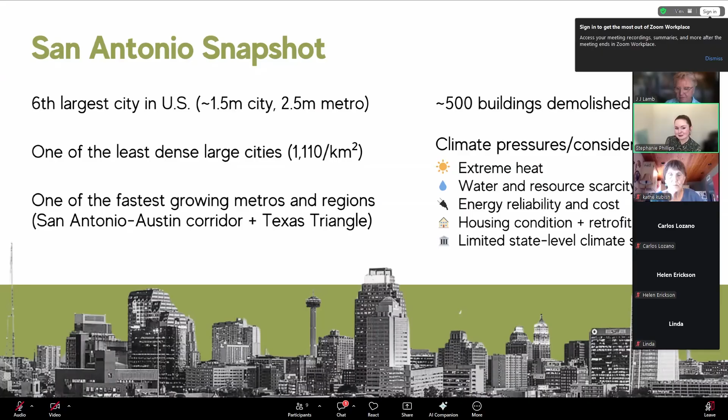And our specific program that we'll be going over today is our Deconstruction and Circular Economy program, which again is housed in the Office of Historic Preservation. This program is relatively new. It was formalized in 2022. And really our goal is to leverage the reuse and repurposing of buildings and their materials in an effort to advance local economic, cultural, and social prosperity. So when it comes to building material reuse and building reuse in general, you hear a lot about the environmental benefits of those. They are vast, but we also want to bring in the cultural and historic preservation dimensions as a key component of our program.

And to facilitate the mission of our program, we have 4 primary program areas that our team works on every single day. And by our team, I mean me and one other staff person. There are 2 whole people that do this. The biggest thing that we administer, which we'll talk a lot about today, is our deconstruction ordinance, an actual local law that requires deconstruction for certain building types. And to support that policy, we also have a deconstruction workforce training program.

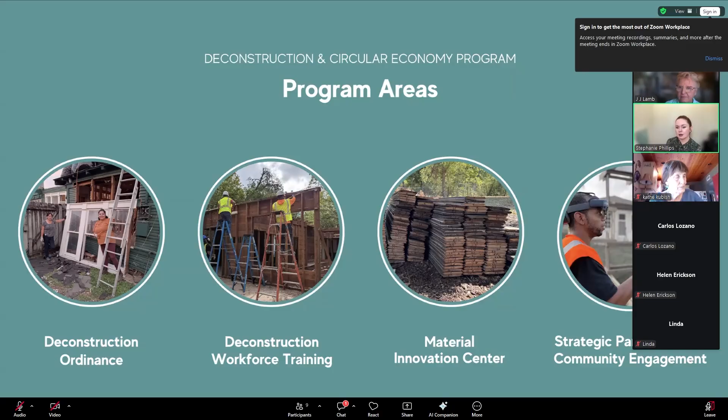We have a small facility called the Material Innovation Center that recaptures and redistributes building materials, which I'll talk a little bit about later. And then something that really undergirds our entire program is our efforts to focus on strategic partnerships and community engagement. It would be utterly impossible for us to do this by ourselves. So it's really, really important to us to continuously build partnerships within the city of San Antonio, the region, and honestly, we're really engaged nationally and internationally on the topic of circular economy in the built environment. So a big part of my job is managing those partnerships.

And something that's really important for us to emphasize as well is that we view our program as a demolition alternative, not a preservation alternative. So deconstruction does not take the place of preserving a whole building. That is always the goal. So we leverage the programs and policies on the books in San Antonio to try to keep buildings standing as much as possible. But if a decision has been made for the building to come down, that's where you go down the fork of, does it require deconstruction or can it come down via traditional mechanical demolition?

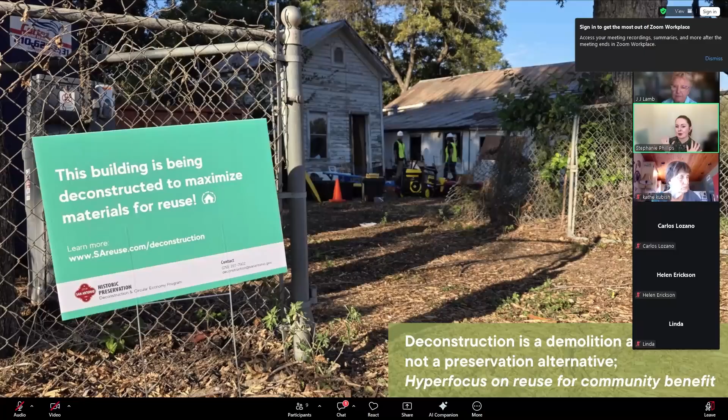And just that focus on deconstruction being a demolition alternative has also really instilled in us that our program has a hyper focus on reuse for community benefit. So you'll see that as a thread through how our program functions, and the work that we do is really focused on leveraging material reuse to benefit workforce development, affordable housing, arts, culture, education. So we really want this to be something that benefits the community in as many ways as possible.

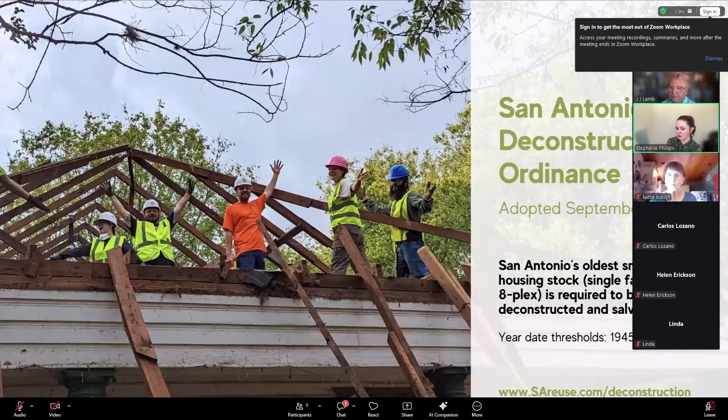And the first program area I really want to highlight is our actual deconstruction ordinance. So we are the largest city in North America currently with a deconstruction policy and actual regulation, and it was adopted in September of 2022. It requires our oldest small-scale housing stock, which I'll elaborate on in a second, to be deconstructed if it is approved for removal. And some key dimensions of this policy are unique to our city. You'll hear about a few others in this webinar series, but our ordinance only applies to residential structures. It doesn't include commercial or industrial or institutional, although we do have ambitions in the future of potentially expanding our ordinance into those building types.

We also took a phased approach to our ordinance. So in September of 2022, City Council adopted our ordinance, and it included automatic expansions. So the first phase of our ordinance only applied to city demolitions, and it applied if the building was built in 1920 and earlier, anywhere in the city, and 1945 and earlier in historic districts or any of our protective overlays. And then phase 2 took effect in January of 2023, and that expanded to all demolitions, including private demolitions. So if you were a developer or a property owner that wanted to demolish a building, those parameters applied to those projects.

And then finally, in January of 2025, we expanded in our final phase, which is active currently. And that expanded the build date to 1945 and earlier anywhere in the city, and 1960 and earlier in those protected districts. So we're starting to inch into the mid-century building types in landmarks, historic districts, and neighborhood conservation districts.

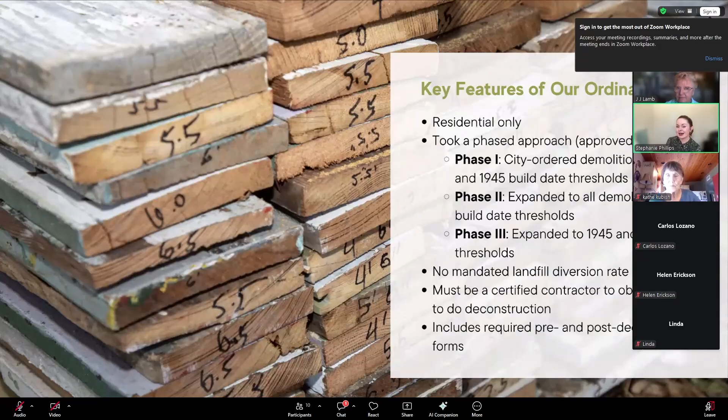So I wanted to give you a sense of the timeline for this policy development, because I hear from y'all in Tucson and a lot of other cities like, oh my gosh, we're so behind, we need to do this right now. And I want to emphasize, it took us 4 years of dedicated policy development to get an ordinance across the finish line. That may seem like a short amount of time to you. That may seem like a long amount of time to you, depending on your experience with city policies and how quickly they can move.

Our phase 2 was in effect for exactly 2 years, and now we're in that third and final phase, which is indefinite. And the best way I can describe why we chose a phased approach is we wanted to take bite-sized pieces out of the demolition pipeline and convert those buildings into deconstruction slowly, so that our workforce training can build up contractors to do the work on behalf of those that needed to take down buildings via deconstruction.

But our near west side and our near east side has the exact same housing stock as some of these historic districts. They just don't have the regulatory tool to avoid demolition. But that doesn't mean that they're any less worthy of protection. It's just literally a zoning overlay that determines if it's easy or hard for a building to get demolished.

And just to kind of formalize that, this is our position. Our work does not end at a historic district boundary. This is a form of preservation too. If we can recapture building materials and develop policies and systems and partnerships to get them back into older houses to restore them, that is absolutely a preservation win. So this kind of ideology is growing among the preservation field nationwide, and we're really excited to kind of spearhead that.

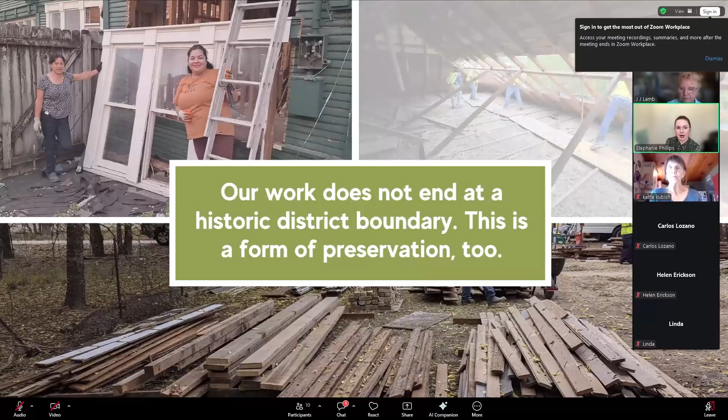So a key step that we took when we were developing our deconstruction policy is we formed a deconstruction advisory committee. And I wanted to break down who was represented on that committee for you all. We had a bunch of public agencies, so a bunch of city departments spanning from solid waste to housing to public health, as well as our local UT San Antonio University, and then our regional council of governments.

We also had a lot of nonprofits and community organizations represented. So our preservation nonprofit, a lot of environmental nonprofits were involved in the discussion. And then it was really important to us to also bring in private entities to the conversation, the people that would be most likely to be affected by this work: demolition contractors, deconstruction contractors, general contractors, reuse stores, landfills and waste haulers, and then major developers. We also had land use attorneys on our committee.

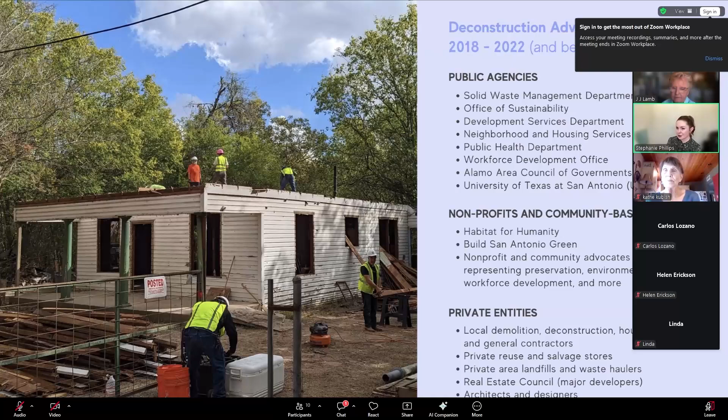So it was really important and actually really effective for us to hold meetings pretty consistently that had the most environmental people and the most pro-development people sharing a room, because that doesn't always happen in practice. And it was really important for us to work together to develop a policy strategy that really made sense for San Antonio specifically. So this is what that advisory committee looked like.

And from a preservation perspective, something that was really key in launching our policy development is doing what we do best, which is nerding out over historic research. So I think it was really, really key, and we continue to communicate this, is that deconstruction is not new. It's not like this new fancy thing that we're making up and telling people to do. It's what we used to do when we removed buildings before we invented the heavy machinery that tears down buildings today. So demolition is actually very new in the scope of our building trades, but deconstruction is a historic trade, and that's how we communicate it.

So we went around the city a lot into our historic neighborhoods and really emphasized that this is a historic practice, and wanted to tackle head on any concerns that the preservation community had around, oh, we're going to talk about buildings coming down, which can be a scary conversation sometimes.

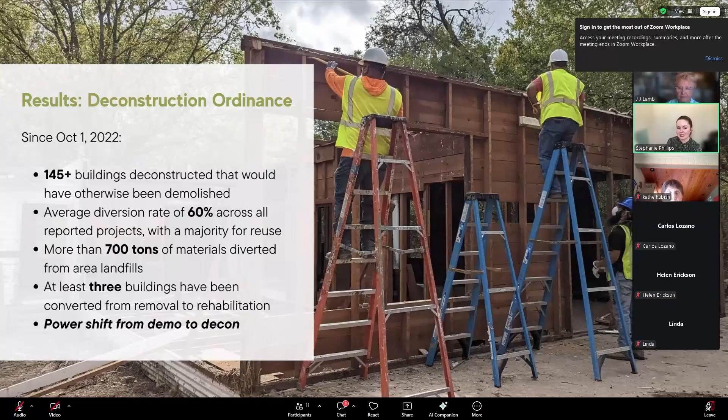And I promise to take you behind the scenes on what this looks like in practice. So our office and our team specifically looks at every single demolition that comes through the pipeline. And if it looks like it's older, pre-1920, we create this build date confirmation form.

And this is where I think preservationists really excel in this conversation, is that we're using a lot of primary sources that you might be familiar with: city directories, Sanborn maps, deed research, newspaper archives, looking at the architecture of the building to confirm the build date of the property.

And just an example of what this looks like in practice, this cutie little historic property was coming down, and we needed to confirm that the build date fell under the deconstruction ordinance. So you'll see that Jess, our staff member, looked at city directories. She found a deed of trust that is dated 1919. You'll see that she was looking at city directories to confirm that this building was occupied in 1919. And then here on the Sanborn map, she found that exact structure with the same footprint.

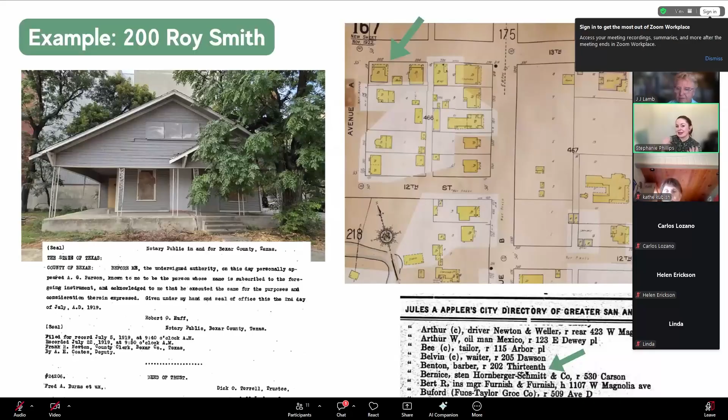So this is a little bit of behind the scenes of the work that our staff does to really make sure that a building is falling under the ordinance, while also developing a bit of a historical record for a lot of times buildings that are a little bit more simple, utilitarian, but also are really important and deserve to have their history documented, in addition to the beautiful landmarks that are celebrated across the city.

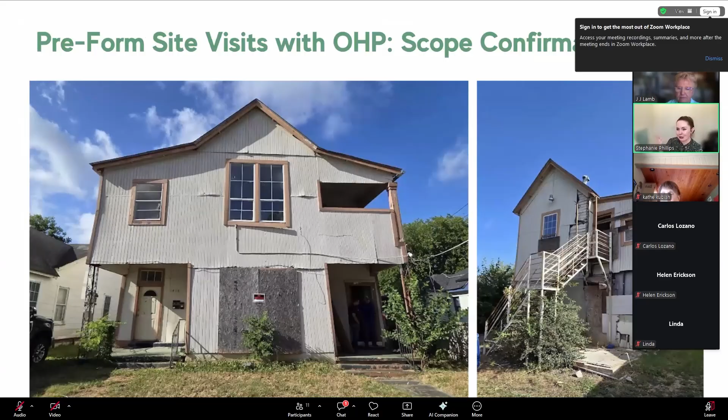And something that we also do is, if necessary, we offer complimentary site walkthroughs with our contractors to identify salvageable building materials. And I love using this building as an example because she's looking rough. Clearly, this building has had tons of modifications over time. It is not in the historic district, but it falls under the deconstruction ordinance. We like to call these houses Frankenstein houses because they just grew and grew and grew, and now it doesn't really have its own personality.

However, when you get inside buildings like this, you're always going to find the beautiful bones, original features of the building. So you'll see original woodwork, really detailed woodwork. This was a very, very nice building when it was built. Really gorgeous, thick foundation beams. Sometimes these are 2 by 16. We've had foundation beams that are literally 30 feet long. It's just amazing lumber that you can't find today.

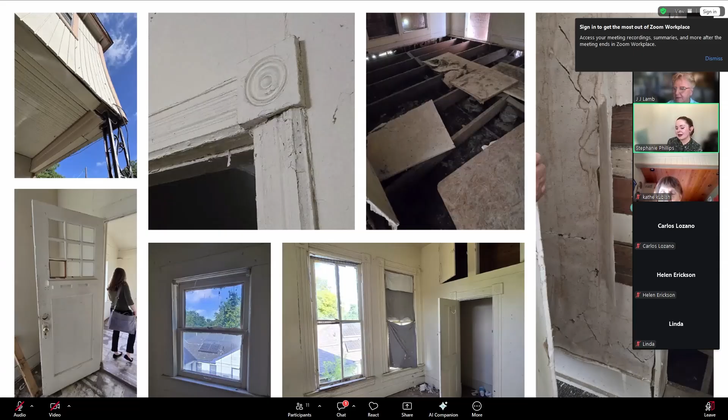Original doors, original windows, and then I carry a hammer and a wrench in my purse literally everywhere I go. So I'm always ripping off drywall, ripping back wallpaper to reveal gold behind the walls. This is original shiplap that is very easily salvageable.

So what we produce from these site visits is we'll define what portion of the building is subject to the deconstruction ordinance. So in this case, we had the original footprint of the building, and then these were additions that were built in 1980. So the contractor is more than welcome to deconstruct those if they'd like, but they're not required to because of the build date trigger.

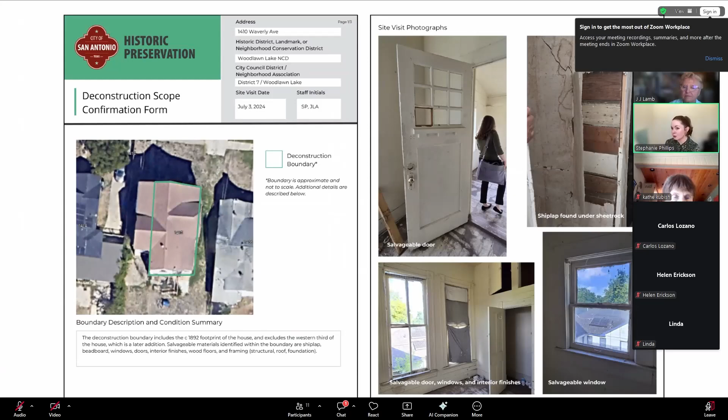But then we provide an entire list of materials that need to be salvaged, and we'll provide photographic evidence from those site visits. So this is not a requirement for our ordinance for one of these to be produced, but if the contractor really wants this guidance for themselves or to communicate with the property owner, we are more than happy to create this document.

And I also want to give a little insight. This ties back to an earlier comment about how our ordinance doesn't mandate that a certain percentage of a building is salvaged. And this is why. So this entire building, it's really difficult to see from the pictures, but it was on fire for a long time. You can see the back here is all charred, but the front facade was relatively unscathed. If we had an ordinance that mandated that 50% or 75% of a building had to be salvaged, it would be impossible because so much of it was burned by fire.

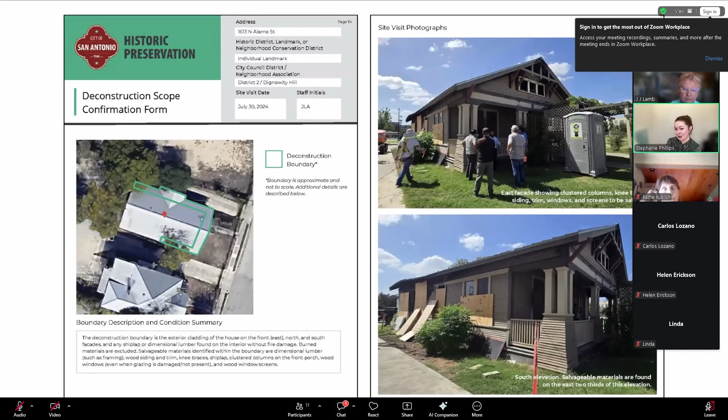But since our ordinance is property specific and flexible, we worked with the certified deconstruction contractor to basically recover what wasn't burned. And you can see more images from that site visit. The back looking rough, these top eaves looking rough, but then you see the parts that weren't charred that are still easily salvageable and can be recovered for reuse.

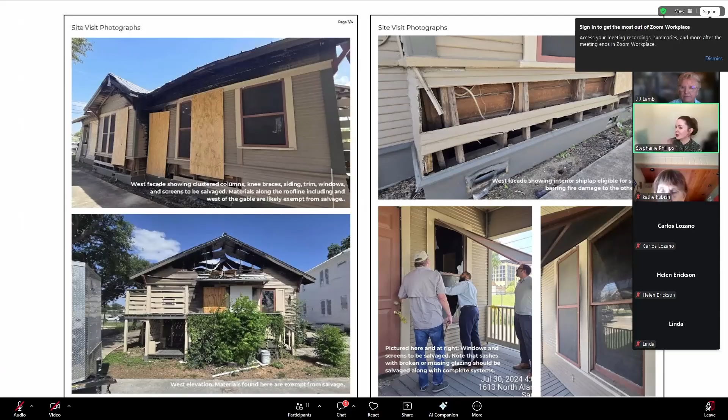And I believe our certified deconstruction contractor recovered around 23% of the building materials on this structure. And that is a win for us. If it's salvageable, we want it to be salvaged. So just a little insight into why our program operates that way.

We get a lot of questions about where the salvage materials go. We do not mandate that they go a certain place, only that they be itemized on our forms. So a lot of times contractors will recover the materials and sell them themselves, or they'll make it to a reuse store where they're sold to the general public. Sometimes the property owner is demolishing a building to build a new building, and they're going to keep this gorgeous material to build that structure.

Or my favorite thing that happens with deconstruction, because it takes several days instead of one day, is every single time we do a deconstruction training, we have people coming up to the site saying, hey, my house down the street has the exact same flooring. Can I buy that from you? Because I want to fix some of my flooring, or I want to build an addition and keep that same flooring. So that's what I refer to as like a microcircular economy.

That is the best outcome, is now that this building is being deconstructed, the neighbors occupying buildings of the same construction era can use this amazing material to repair their building. I started saying that instead of knocking on your neighbor's door for a cup of sugar, you're knocking on your neighbor's door for some shiplap. So that's what we want to see more of, and we're happy that that happens because it keeps those materials in the neighborhoods from which they originated, which is impossible if you're just demolishing the building and throwing it away.

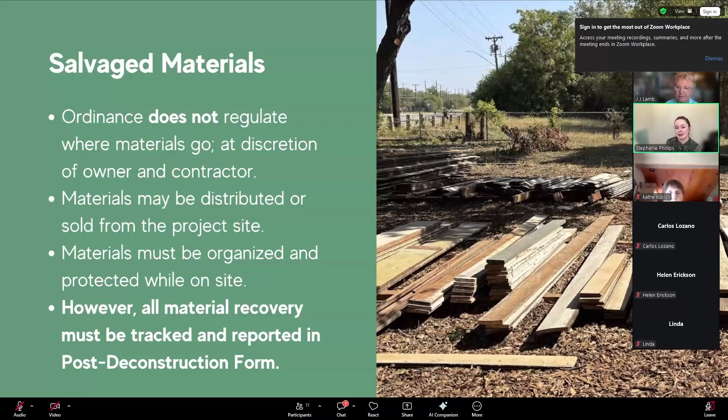We also focus so much on deconstruction contractor training. I'm going to highlight here, this is the statistic that I think is really important to communities that are considering a deconstruction policy, is that we've increased the number of deconstruction contractors that are active in San Antonio by 525% since 2019. So when we started deconstruction training, I want to say we had around 5 contractors doing this work here and there. Now we have well over 45 and into 50.

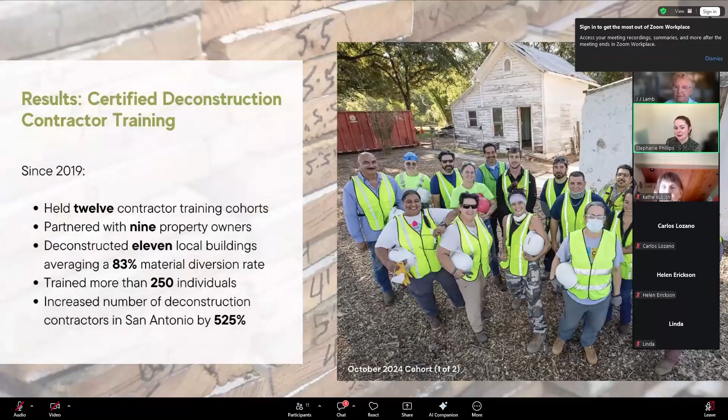So workforce training works. It's really, really important to make sure that you're not legislating a policy that is technically infeasible to do. So we as the city think it's really important for us to offer these trainings at least once a year indefinitely. We have no plans on stopping. And I'm gonna flip through some photos so you can see what this looks like in practice. So this was from 2 years ago.

These buildings were owned by the National Park Service. They were actually on the National Register of Historic Places. But we can't tell the federal government what to do. So they made the decision that these buildings had to be demolished. There's a creek right next to these, and it was becoming, in their words, a flood risk. So they elected to demolish these buildings, but through our strategic partnerships and communication, we offered to host a deconstruction contractor training at these sites because these are really significant buildings, and it was important for us to treat them with care at the end of their lives.

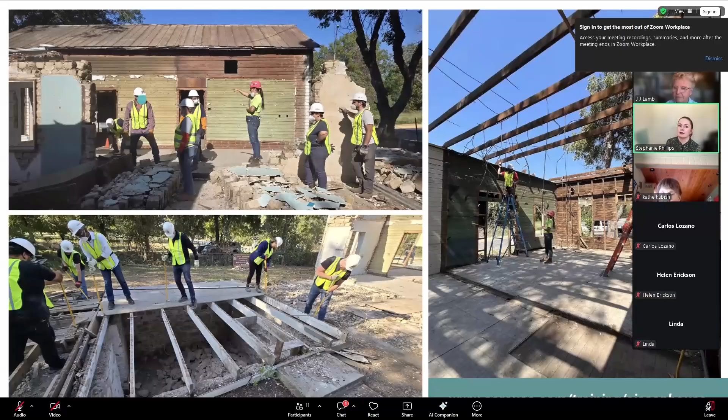So these are just some behind the scenes, taking down those buildings. I love this stage of deconstruction where you can see kind of like the history of the building's occupation over time. The interiors of buildings are very rarely documented through traditional historic preservation documentation. It's largely focused on the outside of buildings. So this is when you really get a chance to see how the building lived and how the building occupants used the space over time, and capture that and add that to the historical record.

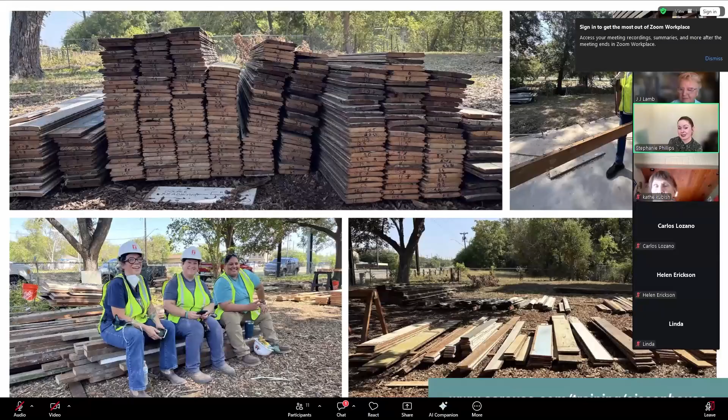And then the materials, y'all. I'm preaching to the choir, but we refer to these as non-renewable resources. This is old growth lumber. The lengths are insane. The quality is bar none, and this is what we're able to salvage and redirect into community use. Just one trailer full of gorgeous lumber heading to a new project site.

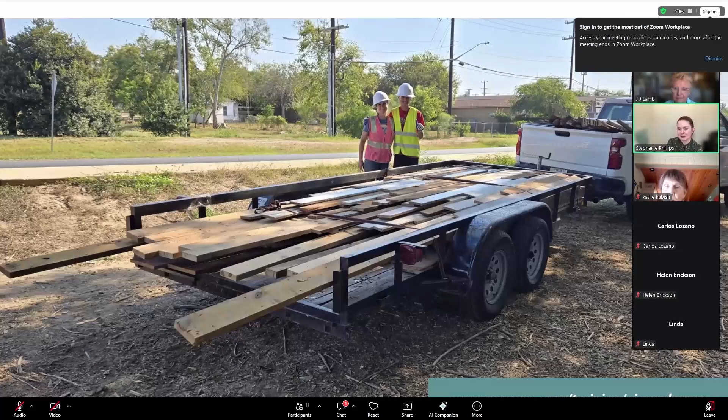I will briefly mention that the city does have a facility where if people want to donate excess building materials, including an entire gable if they want to, we basically serve as a holding place for excess building materials. And then we also connect materials into community use.

And what I mean by that is if people are donating lumber, doors, windows, siding, we can connect them into affordable housing projects that the city is leading. We can funnel them into trades and design education, and we can funnel them into creative community impact projects, including public art and other uses.

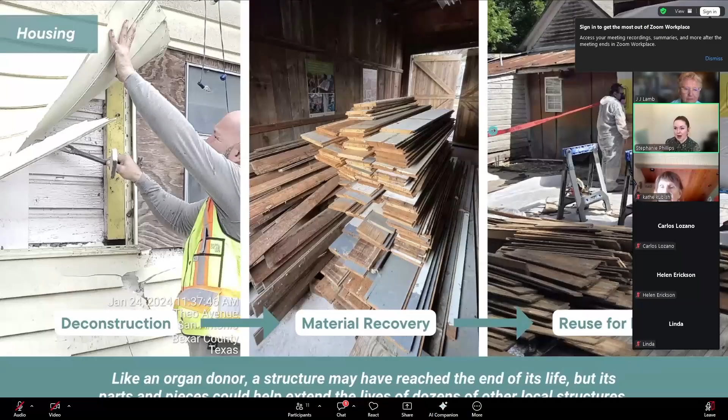And just some examples here, affordable housing. This is kind of the path that we now are able to take with this policy and program in place. A deconstruction contractor finds gorgeous siding hiding underneath styrofoam. Crazy. We hold that material until the next project becomes available. And then in this case, siding from 1919 was installed in an affordable housing repair project from 1919 in the same neighborhood.

Like this is exactly what we want to happen, and this is where we spend a lot of our efforts, working with other city departments to try to prioritize this instead of just using Home Depot lumber to fix an old house. Because I think a lot of us know that the older materials will weather differently, they're longer lasting, and we want to be able to have a longer lasting repair. And the best way to do that is to use materials from the same construction era.

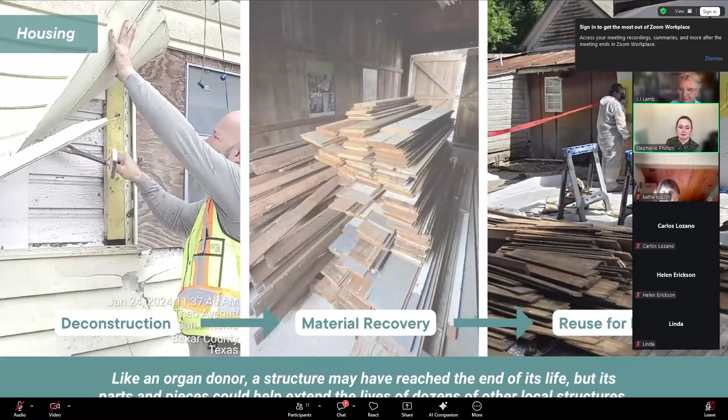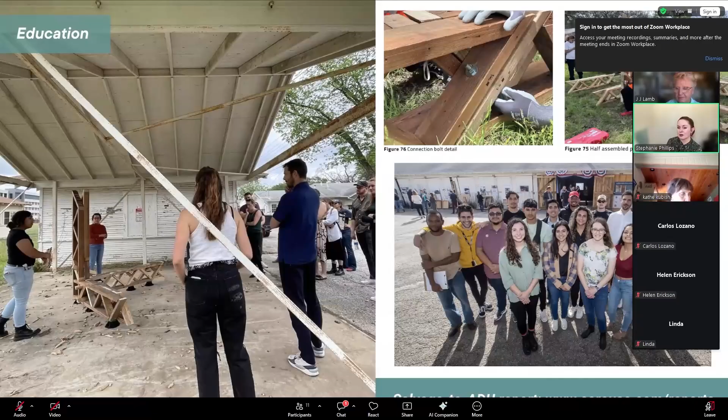We also work really closely with UTSA and other colleges to do material research. So this is another report that we worked on a few years ago, where an entire architecture studio at UTSA was looking at how reclaimed building materials, if they can't be used for their original purpose, can be used to construct accessory dwelling units or ADUs to help tackle our affordable housing problem in San Antonio. So there's an entire research project that was done using some of the materials that were donated to us.

And then a big thing that we're working on right now, we are building our first bus stop shelter out of reclaimed materials. So working with our local public transit authority to try to prioritize the recovery and reuse of building materials that already exist in the city for our bus stops, instead of, you know, shipping something from across the world.

And then I think a really low-hanging fruit for any city, especially a city like San Antonio or Tucson, where it's so hot and shade structures are so necessary. For us, we think it's a slam dunk to use existing building materials for these shade structures. So instead of harvesting lumber from across the country or the world, or using metal or something else, we're able to use the materials that come into our facility and redirect them into a community project.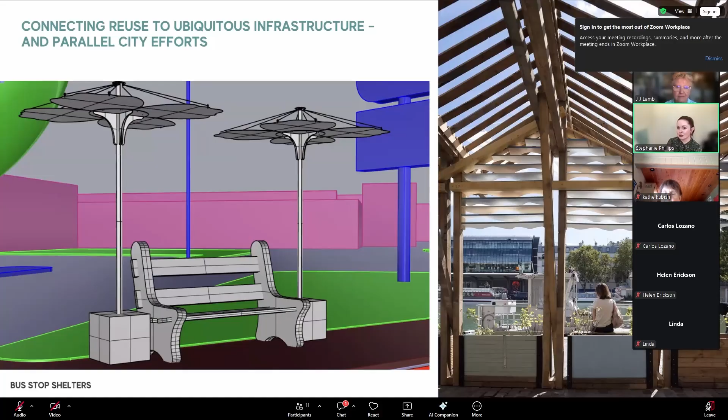And the added bonus of this is that we also track where all of the materials came from. So in these instances and the projects that are under development, there's a little plaque or an interactive QR code or some sort of interactive component to these shade structures where people can actually learn about the history of the materials and where they came from, and the history of the house that was deconstructed to provide these materials. So that's just another way that historic preservation is starting to be integrated into community infrastructure.

So I will conclude with these hot tips, because I know that we wanted some feedback on what you should do, what you should not do, what we learned, what we would do better. So some things that were really key to us in developing this program were bringing a diverse array of stakeholders to our Deconstruction Advisory Committee right away.

We also prioritized deconstruction contractor training, which I will recommend to any community. We focused on what would work for San Antonio specifically, instead of looking at another city and trying to copy what they did, because it's really locally dependent on how these programs work.

And then number 5, I think, is really great because it's what you're doing now. We contacted as many people as we could in different cities and communities to really learn what was working there, what wasn't working there, to help inform our efforts as well. And then we did some really proactive community engagement, going back to me telling the story of finding newspaper archives, demonstrating that deconstruction wasn't new, to really showcase to the general public that this is a topic worth pursuing here in San Antonio.

And some things looking back on our efforts that I wish we would have done earlier. I really wish that we would have formed an inner city work group of different city departments to kind of get to a point where it wasn't just our department leading the effort, but it was more of like a shared leadership experience. And I say that because we still are kind of training other departments on why this is important. And I think we could have gone a little further, a little faster, if we all felt like we had skin in the game, if that makes sense.

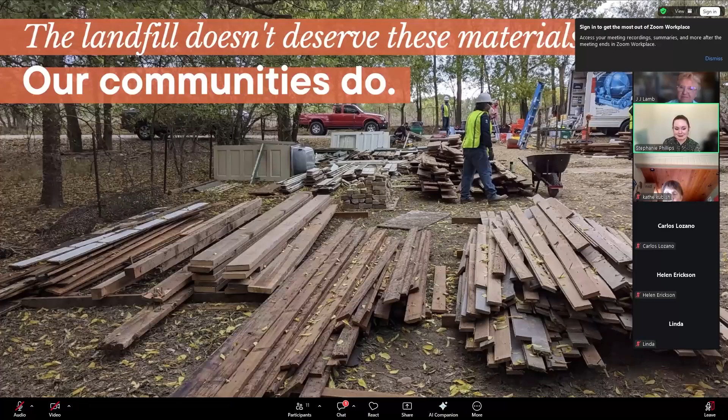So yeah, that's the end of my presentation. I'm really looking forward to any questions that you have in our remaining time. Great. So does anyone have any questions?

Oh, Kathe, I know you do. Oh, Carlos or Andrew? Yeah. Whoever wants to go first. I have a few. Oh, well, let's hear your questions, Andrew.

Okay. I was wondering if you could kind of walk us through a brief overview of how this works with your permitting process. You know, once somebody applies for a demolition permit, how is it reviewed? Are there certain inspections they have to have throughout the process? And then I know you mentioned the paperwork at the end that they fill out, but how does that fit into a normal permitting building process that may be different?

Yeah, that's a great question. So we really intentionally wanted to disrupt the existing demolition permit process as little as possible. So everyone applies for the same permit, a demolition permit, and then our office has a review on every single demolition permit in the entire city. So we basically are able to hold that demolition permit from being issued until the deconstruction requirements are met. And in our case, that's making sure that a deconstruction contractor is brought on board and that pre-deconstruction form is submitted. So that is very simply how it works. And it was designed that way to be as user-friendly as possible to the people that are performing the work.